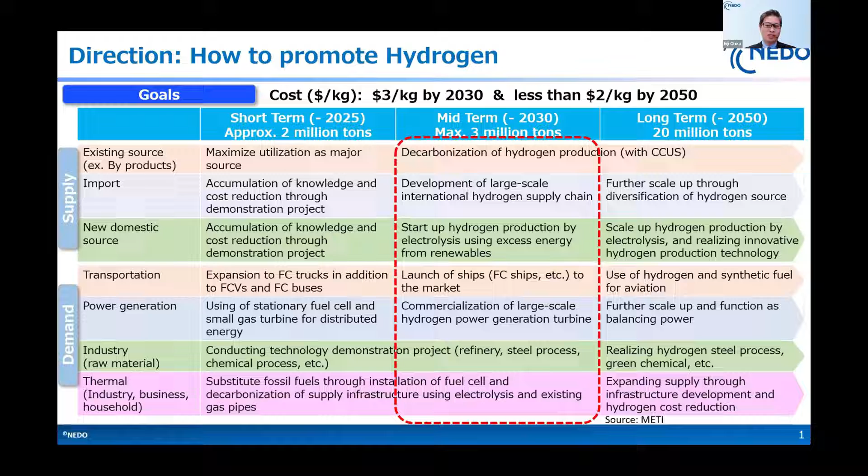But I would like to stress the mid-term, 2030. It's a very important year for us because then we may start hydrogen power generation. And to meet a huge amount of hydrogen demand, we may start to import hydrogen by 2030. And also, to expand Japan's domestic hydrogen resources, we have to actually commercialize domestic renewable hydrogen also by 2030. We just have 6 years until this very important year, 2030. We need to accelerate all of the activities.

We have set a new target for 2040 in the hydrogen target, an electrolysis installation target, which is 15 gigawatts, and globally we may set a carbon intensity based criteria. But most of all, I would like to say that the main point of the new strategy is that it's not only an energy and environment policy, but also an economic policy.

Under the new strategy, Japan's government is pushing to accelerate industry activity globally, where the new strategy sets several priority areas, which are power generation and fuel cells, electrolysis, hydrogen supply, hydrogen carriers, and hydrogen storage technology. In any of these priority areas, we are pushing to develop new markets globally.

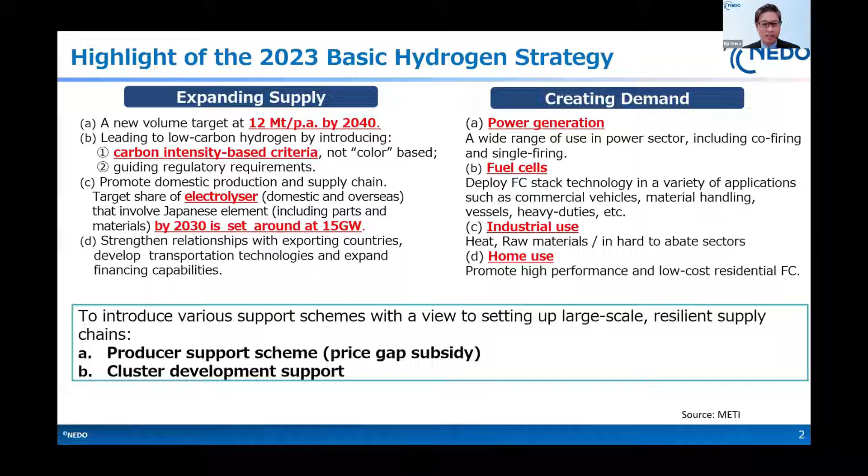This slide shows the current status of hydrogen application in Japan. We have stationary fuel cells, residential fuel cells, which indirectly use hydrogen on a city gas basis, but in a huge number already installed—500,000 residential fuel cells in Japan. In the mobility sector, we have 8,000 passenger vehicles, 150 fuel cell buses mainly running in the Tokyo area, where you may see them frequently, and we have 170 public stations.

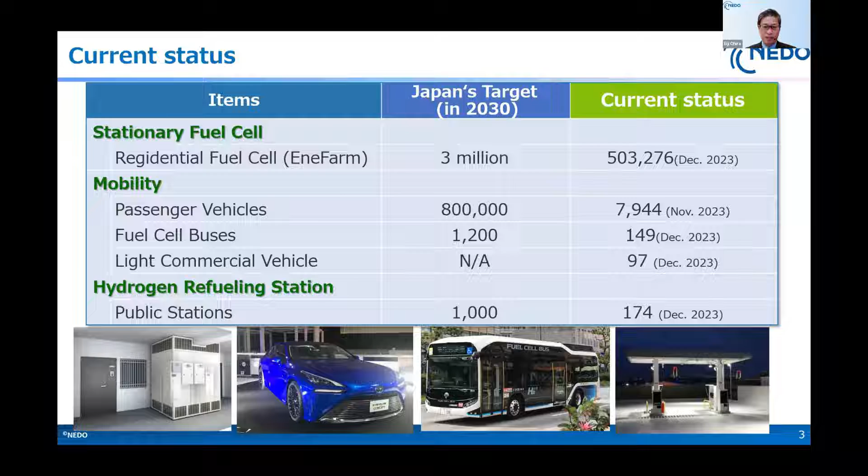Under private sector efforts, we may develop several new fuel cell applications. Honda and Toyota announced a new fuel cell vehicle, the Honda CR-V, and are collaborating with truck companies—we may have heavy duty trucks with Hino or Isuzu. Also, Japan Railway Company JR East has joined in hydrogen; they started demonstration of a fuel cell train.

Recently, motorcycle companies Kawasaki and Suzuki, etc., developed hydrogen engine vehicles and hydrogen motorcycles. For example, the Research Association of Hydrogen Engines developed a hydrogen buggy which participated in the last Dakar Rally.

So from this slide, I will talk about NEDO's activities. We are working on hydrogen production, storage, transport, and utilization, and we support fundamental research, applied research, and demonstration, along with regulation, codes and standards.

Today I'd like to pick up our activity about hydrogen scaling up. The first slide will show our recent work on demonstration of commercial vehicles. We believe commercial vehicles are a key device to develop enhanced hydrogen demand or improve the capacity factor of hydrogen filling stations.

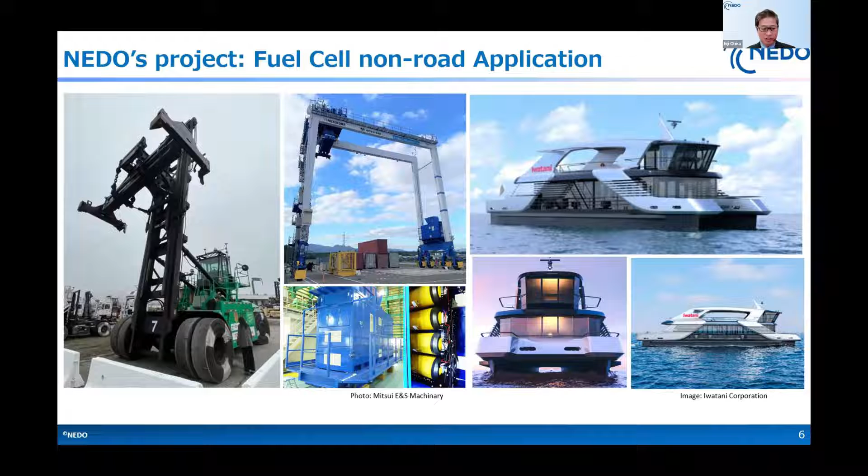In terms of application as a transition, we believe the hydrogen gas turbine is a key device to develop and enhance hydrogen demand. We are working on a small size hydrogen gas turbine developed by Kawasaki Heavy Industry, which we've demonstrated over 5-6 years. They're also working on a large scale 100 megawatt class hydrogen gas turbine power generation.

And Mitsubishi Heavy Industry is working on developing a hydrogen combustor. Our next step, we may install a hydrogen combustor at an existing power station. This demonstration may start next year.

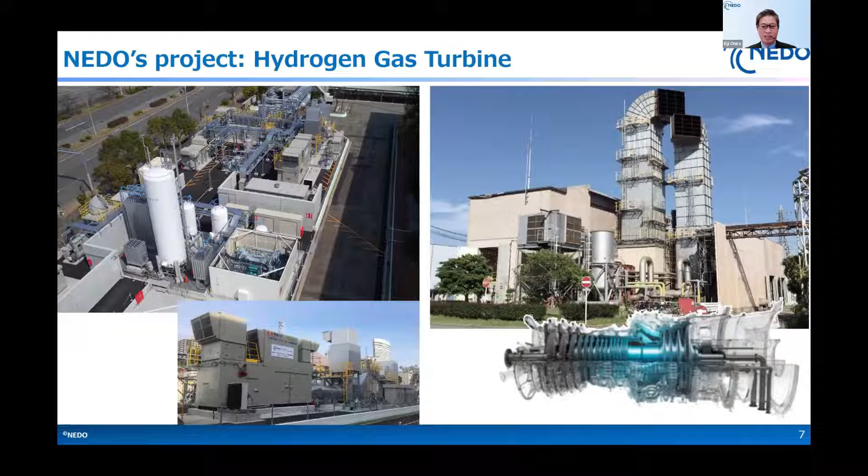To meet the future large hydrogen demand, it's very tough to cover with domestic hydrogen in Japan, so Japan plans to import hydrogen. The challenge is how to concentrate hydrogen for long distance transportation.

There are several types of hydrogen carriers we're working on, but this slide shows our liquefied hydrogen activities. Thanks to Kawasaki Heavy Industry technologies, we've already developed a small but very first liquefied hydrogen tanker, and our test journey between Japan and Australia has concluded successfully.

We continue this kind of work, and our next step is to develop commercial scale liquid hydrogen transportation technology. This is the image for the liquid hydrogen commercial tanker, and the big point is the scale—the capacity of hydrogen is going to be over 100 times bigger compared to the current demonstration level.

We may start the construction from this year, and construction may complete in 2027 or 2028. You may see the commercial hydrogen tanker in 5 years.

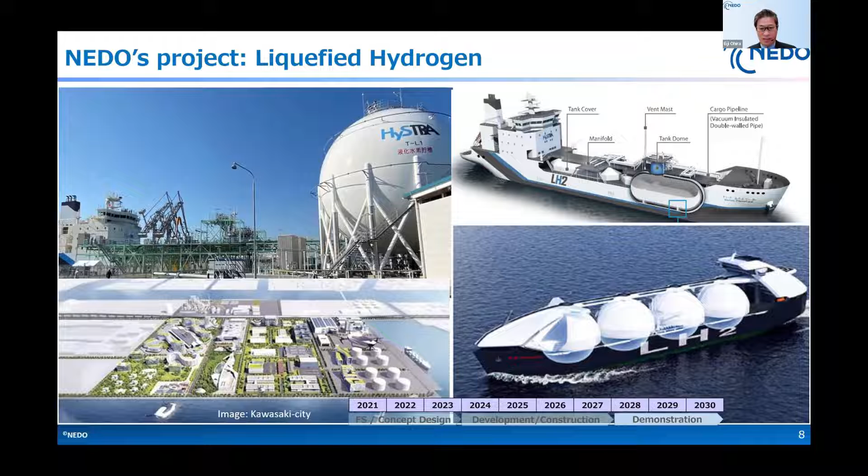Lastly, I will just show the scaling up in electrolysis, which is a key device for power-to-gas technologies. In the short term, we expect PEM and alkaline electrolysis to meet the megawatt scale.

The left side shows our 10 megawatt single stack alkaline electrolysis, and the photo shows our 1.5 megawatt PEM electrolysis. But this is not enough for the commercial side, so we're now working on scaling up both types of electrolysis.

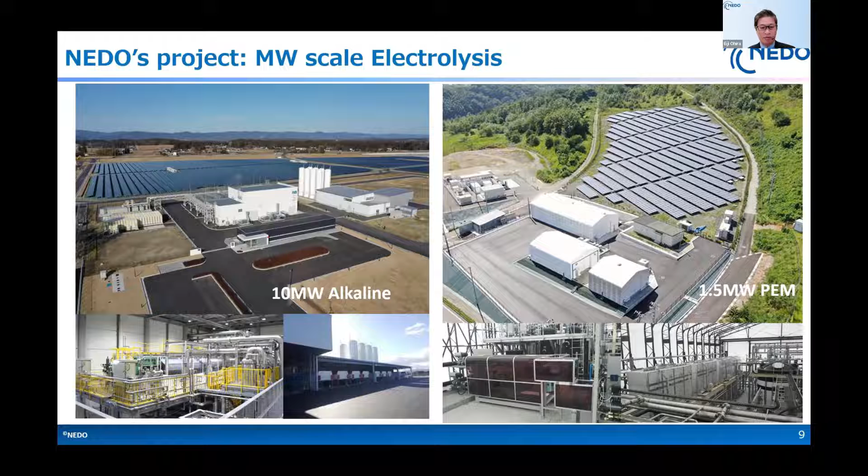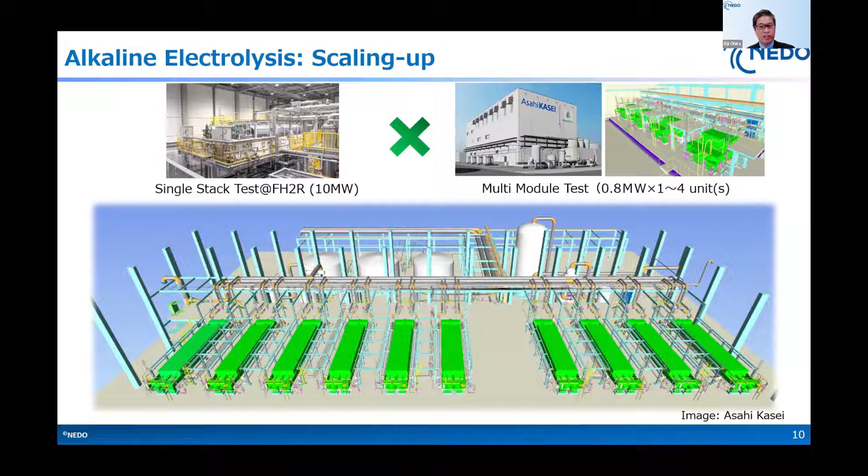This is our image for the scaling up, combining the 10 megawatt electrolysis stack. We make it kind of a multi-module system in the future. This is the image for 100 megawatt, but we may start with 50 or 60 megawatt systems, and we may use it for green hydrogen for chemical production, such as ammonia.

All right, and that's all for our presentation—our activity and policy, and our R&D activities. Thank you very much for your attention.

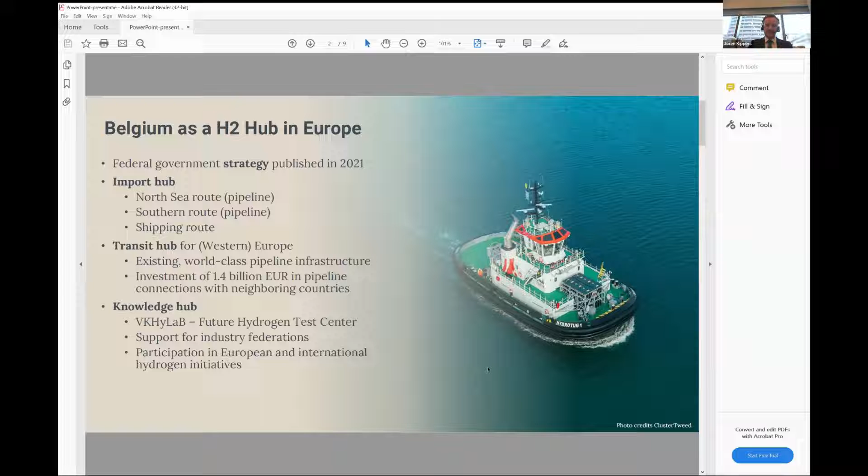Where do we see potential for hydrogen in industry or in the economy in general? Our strategy identifies four key sectors: industry, transport, power, and buildings.

Especially industry and transport are two sectors where we see a lot of potential for hydrogen. We already have a large chemical industry in Belgium that is using hydrogen, and we think it could be an interesting fuel to decarbonize industrial heating processes. We also see hydrogen play a role in heavy-duty transport and as a fuel in shipping. There could potentially also be a use for hydrogen in the power sector and in the building sector, but for the moment, Belgium is very much focused on industry and transport.

Now, how could we work together with Japan? I think Belgium and Japan are in somewhat of a similar position in the sense that we will probably be more importers of hydrogen than exporters. So I think cooperation could focus on three areas: industrial partnerships to further develop hydrogen technology, R&D collaboration into the potential of hydrogen applications, and lastly regulatory cooperation.

For that last part, I think the EU-Japan MOU on hydrogen, concluded in December 2022, will be very important. It has different goals, including working on common standards and certification, exchanges on best practices and lessons learned, and working together on different projects. If we want hydrogen to become a global commodity, we need to work with partners like Japan and others to develop the necessary standards and certification.

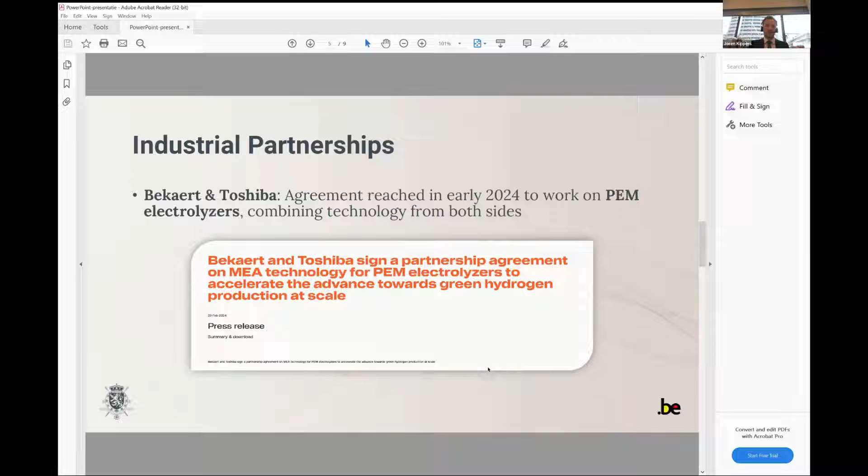Another one, this time in the shipping industry: Compagnie Maritime Belge, CMB, and Tsuneishi, a Japanese shipbuilding company. CMB and Tsuneishi launched a hydrogen-powered ferry in Japan in 2020. This is a small passenger ship that uses hydrogen as a fuel. It's currently active here in Japan, and following the success of this ferry, both companies decided to launch a joint venture in 2021 to further develop hydrogen applications and hydrogen engines for the shipping industry.

One of the projects they would like to do is build a hydrogen-powered tugboat, the HydroPhoenix, which would be a first for the Asian market. There was already a similar hydrogen-powered tugboat active in Belgium, but this would be the first one for the Japanese and for the Asian market.

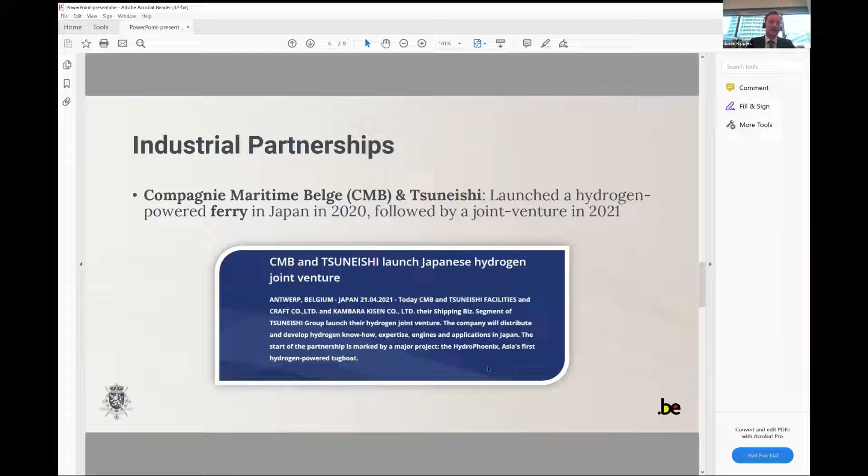Another example from Belgium itself this time is H2PY Serein. This is a pilot project financed by the Belgian government, looking into the use of plasmalysis technology for hydrogen production. The winning consortium consists of a number of different companies from Belgium and Europe, but it also has the involvement of AGC Glass Europe. AGC is a major Japanese industrial company as well, which has its European base in Belgium, and they joined this consortium to work on exploring plasmalysis technology.

A final example of the kind of cooperation we could see in the future: on R&D, the High and Heat project is an EU-funded project which looks into the use of hydrogen as a fuel for high-temperature industrial heating processes, specifically in the aluminum and steel industry. It's a consortium of different European companies - some Belgian, some German, others from Spain. The consortium also includes Toyota Motors, which has its European headquarters in Belgium, so Toyota Belgium will participate in this project as well.

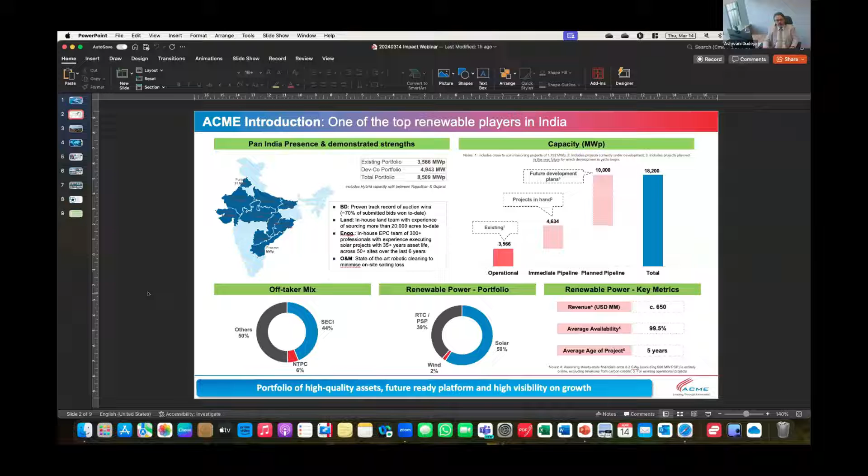Back in 2020, we started venturing into the green ammonia space and developed what was perhaps the world's first fully integrated green ammonia project. It's a small pilot, 5 tons per day facility west of Delhi, about 400 kilometers away, in a place called Bikaner. I'm going to show you a short video of this facility as an introduction to what we are doing.

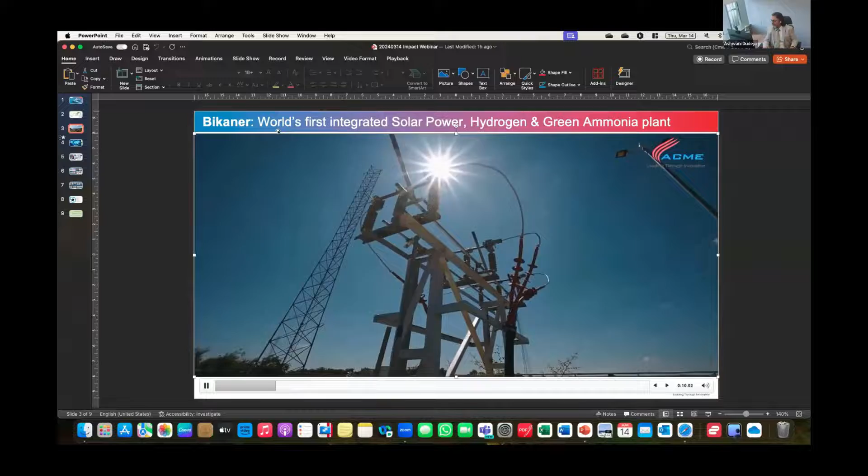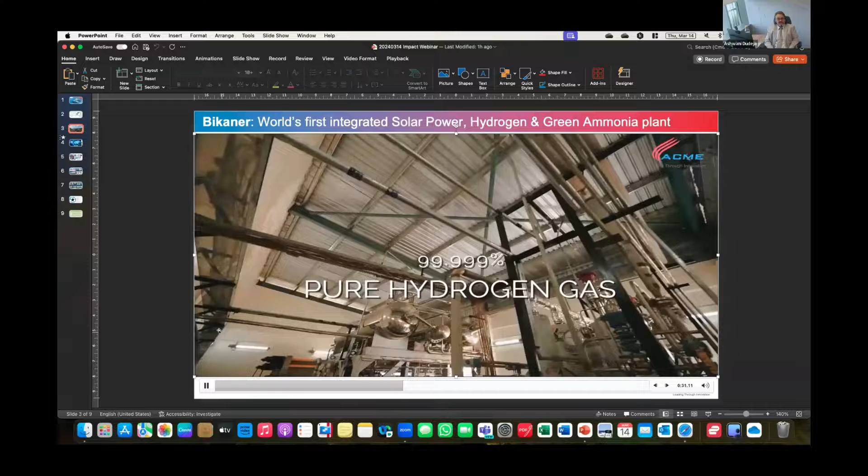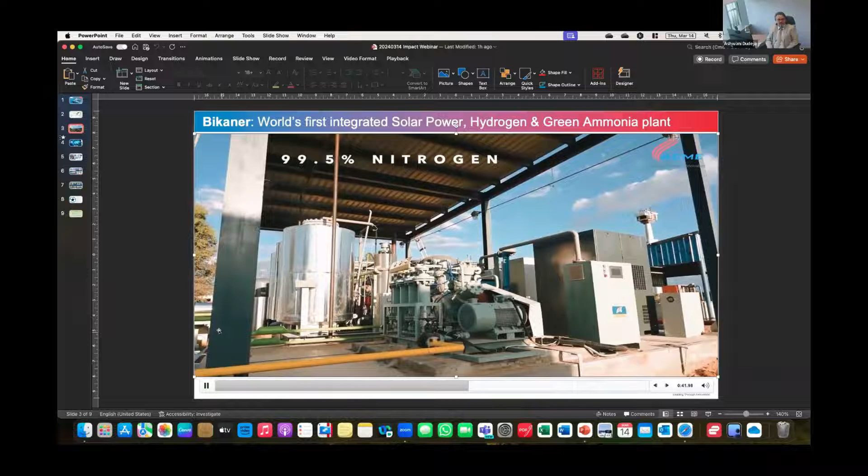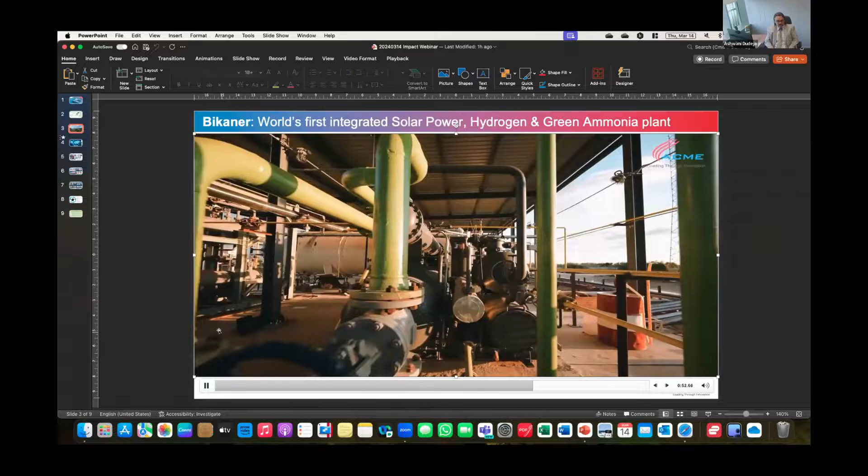This is the plant we built in 2020, a 5 tons per day facility, and everything that could have failed in this plant has already failed. Some equipment failed more than once, but we are very proud to say this facility has now been working for more than 24 months in continuous operation without any breakdown.

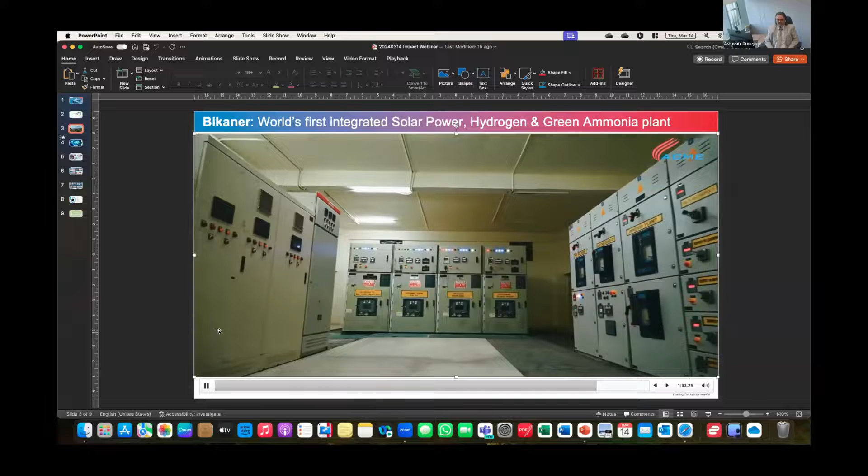We are loading one truck of green ammonia from this facility every 12 to 15 days. This has given us a lot of confidence and experience operating the alkaline electrolyzers installed here. More than 60 operators have been trained, and more than 50 delegations, of which over 30 were international, have visited this facility. This was our starting point back in 2020, when not many people were talking about ammonia. There were only discussions on hydrogen as one of the possible green fuels helping in the energy transition, but not so much attention was being paid to ammonia.

Because we ventured into this quite early, we were also looking at the various places globally where we could develop plants to produce the cheapest molecules. Oman turned out to be one of the favorite destinations in terms of solar intensity, wind potential, locational aspects, political stability, and various other factors we were evaluating.

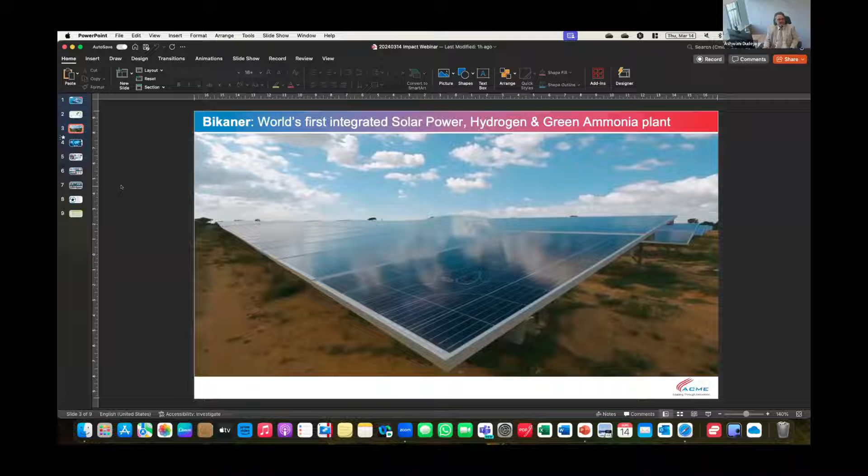We are very happy to share that we are now developing our first large-scale facility of 100,000 tons in Oman. But that's not the only project. Over the last several years, we have developed a pipeline of supply projects in various places. Duqm in Oman will be the first, likely commissioned in the second half of 2026. Following closely will be the East Coast India project in Gopalpur, from where we will produce about 400,000 tons of ammonia in the first phase.

All of this ammonia is targeted towards the Japanese market, and we already have a term sheet signed with IHI Corporation of Japan. Following this would potentially be a project at Port of Victoria, Houston, Texas, and another on the East Coast of India, down south in Tuticorin. Each of these projects is typically going to be about 1.2 million tons, developed in phases as we capture more and more demand.

To capture such demand, we have set up a global presence with offices and representatives. As we speak right now, I have my colleague Kono-san, who is also attending this session. So any of you in Japan, if you need more information, Kono-san would be very happy to talk about it offline.

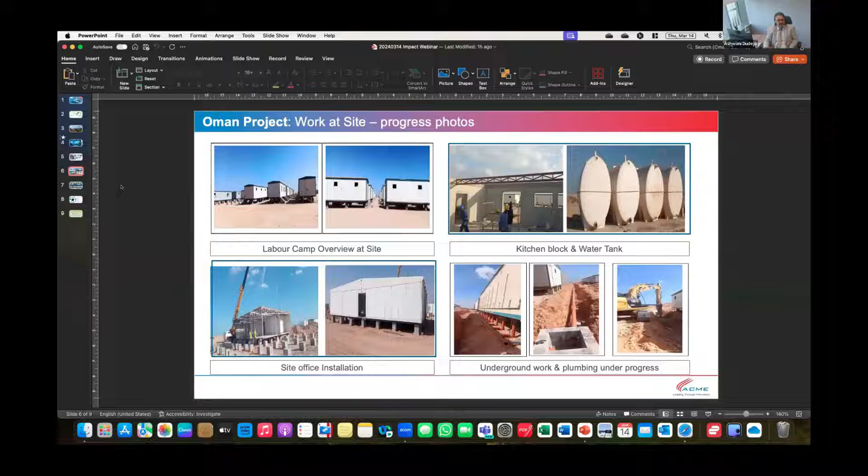We have already done the financial closure for our Oman project, and I will show you quickly a couple of pictures from our site in Oman, where the basic construction activities have already started.

So that's a very short summary about ACME.

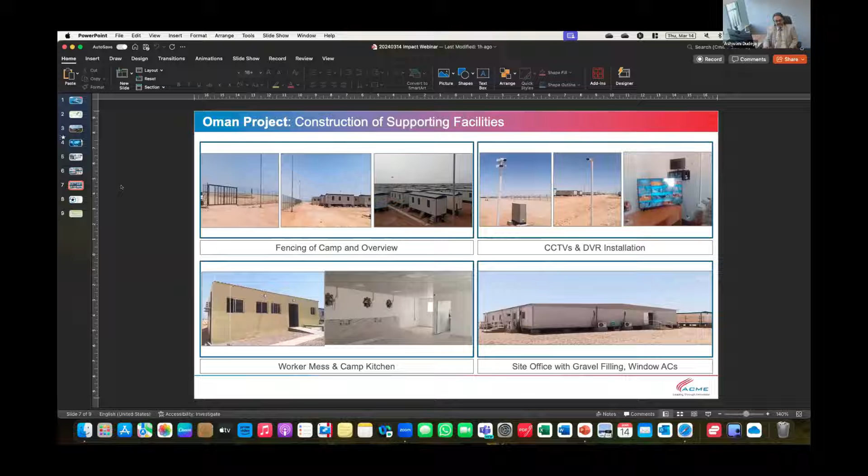I just would very briefly cover some of the challenges which already have been mentioned by some of the speakers previously. I think one of the challenges which everyone talks about is the demand side. But I want to just go beyond demand. Of course, finding demand is the most difficult thing, but once you have found the demand, structuring a commercial contract is even more difficult, I can tell you.

It's not so straightforward. There are no templates available, unlike the LNG industry. There are no standard pricing structures which are available. So you have to do all the discovery between the buyer and seller, and that makes it extremely challenging for both the parties to find common ground.

We also have heard in the previous session about the regulations part, and that to me is a very important aspect. Europe has very clearly taken a stand of going towards renewable fuel of non-biological origin and has established some guidelines and directives under Renewable Energy Directive 2, and 3 is also in the process. But a similar thing has not really been done in Japan or many other parts of the world, which actually creates another very big challenge for a project developer like us.

And the only other one which I would like to talk about in this slide is the end-use applications, which is very important. Most of the project developers at the moment are targeting the low-hanging fruits, which is the existing fertilizer and chemical companies. But there is a case for looking at newer applications, and Japan actually has taken a big lead. We saw how hydrogen running ferries have already been deployed back in 2020 in Japan, but there are direct ammonia firing applications which also have gained a lot of prominence in Japan.

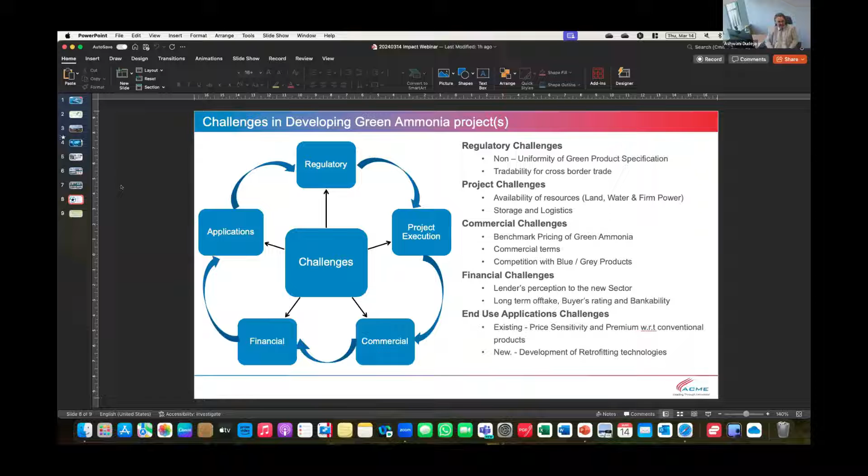25 years ago, 30 years ago, Japan was the only country who were talking about or signing long-term LNG contracts, anchoring a lot of these large-scale projects which came up in the Middle East and various other parts of the world. And something similar should be used for developing the market for ammonia and hydrogen in Japan.

On the regulatory front, as I already said, Europe has taken a very clear path towards electrolysis-based hydrogen and ammonia, but Japan has not done so far, has not announced any kind of regulatory aspects or certification aspects which will clearly distinguish the blue projects or the blue ammonia from the green ammonia.

And our one very strong recommendation, as a company which is focusing only on green rather than blue or gray projects, is to focus on green projects, because we all talk about reducing the cost of green ammonia and hydrogen in the longer run as the economies of scale increase, but the economies of scale is not going to happen until there is demand and the projects are developed for green hydrogen.

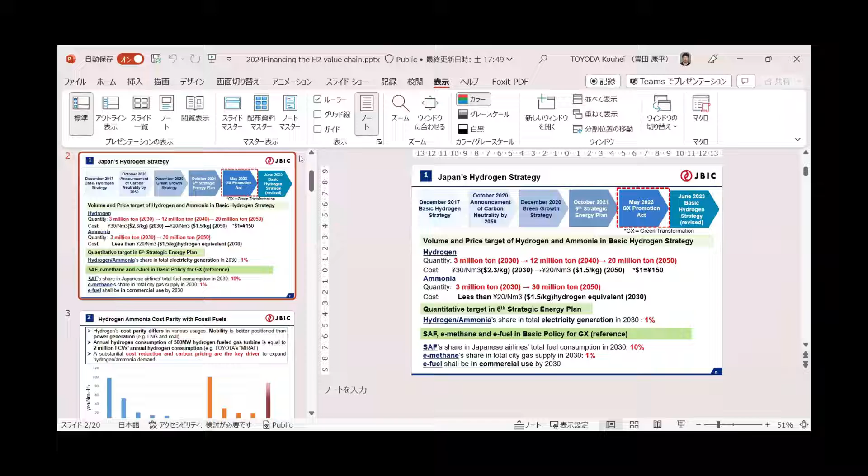Can you see the slide? Yeah, we can see it well, but I think it's in presenter mode. If you can adjust the display mode, that would be better. Working, I think it's still in presenter mode. Can you try to make a full display? How about this? It's better right now, but I think we can just skip this part and you can continue your presentation. No worries, okay.

Hi everyone, I'm Kohei Toyoda, Director General for Energy Transformation Strategy, Japan Bank for International Cooperation, JBIC. First of all, thank you for having me today. I'm going to talk about financing the H2 value chain, Japan's public-private partnership.

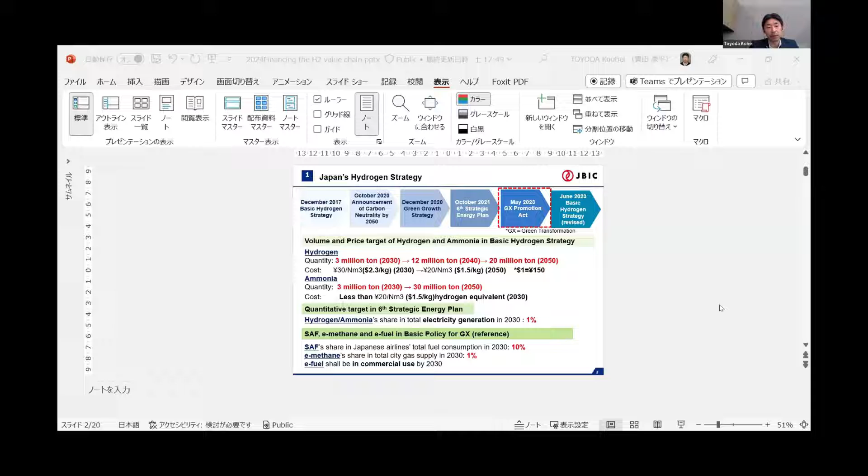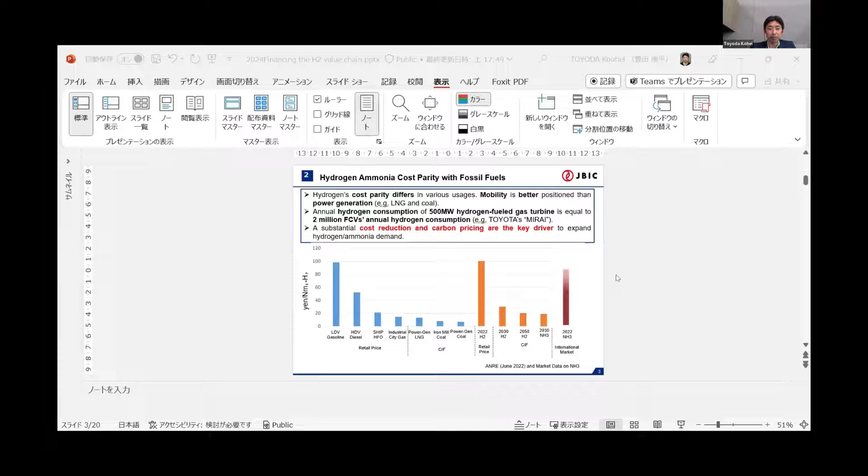And there are 3 ways to reduce the cost of hydrogen: technology innovation, economy of scale, and reducing cost of capital. For technology innovation, Ohira-san already covered the issue. But the government established a 2 trillion yen Green Innovation Fund, which is around 13 billion US dollars, supporting various hydrogen-related technology development.

And in order to induce such a large amount of investment, the government will issue 20 trillion yen GX transformation bonds, which is around 130 billion US dollars, to support early movers. The government also introduced a carbon pricing framework, such as Japan ETS, carbon credit auction, and carbon duties, to redeem the bond, as well as increase the cost of GHG emissions.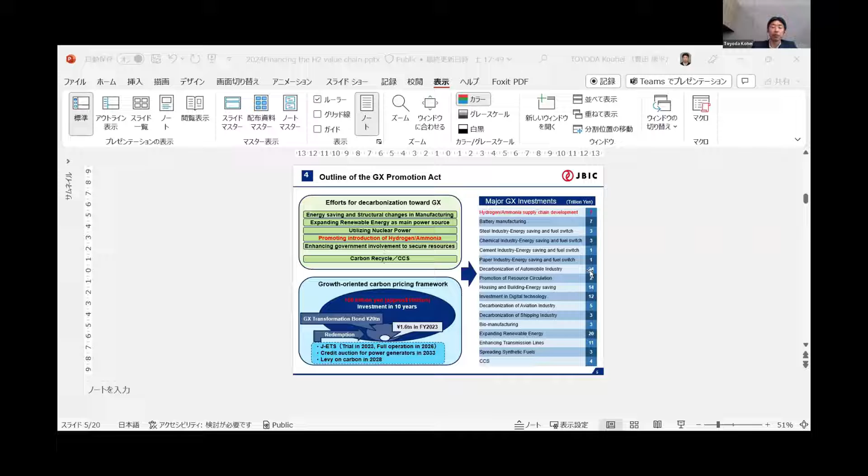The right-hand side is a breakdown of this 150 trillion yen. Japan will invest a minimum of 7 trillion yen for hydrogen ammonia supply chain development, as you can see at the top. And in order to increase the demand for hydrogen, which is quite an expensive energy for many off-takers or end users,

the government of Japan will introduce a large-scale support program, similar to Contract for Difference in the UK. The Japanese government bridges the gap between the strike price, which enables hydrogen suppliers to recover costs and receive a reasonable return on investment, and the reference price, the heat equivalent price of existing fuels such as coal and gas, which enables off-takers or final consumers to utilize clean energy like hydrogen at no or little additional cost for 15 years. The government will spend 20 billion US dollars on this program.

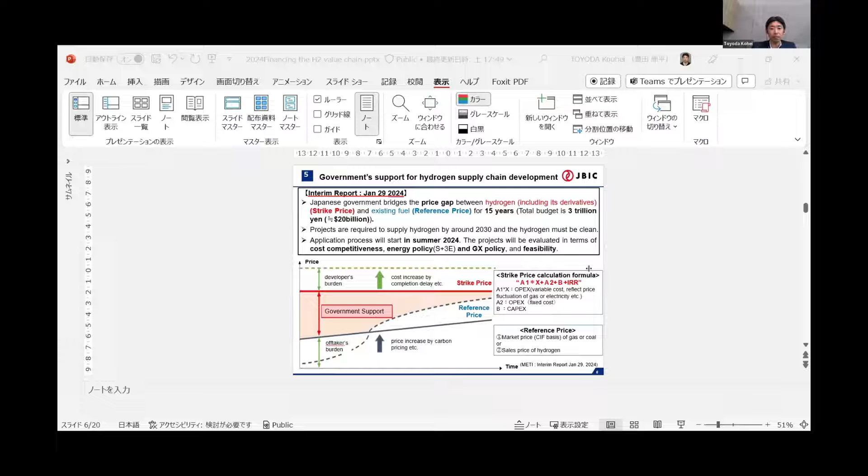On capital cost, I'd like to introduce the World Bank's flagship hydrogen report, which was published 3 weeks ago, and JBIC was part of the working group.

Hydrogen production requires a large amount of investment, especially green hydrogen. This is a ballpark figure, but in order to produce 1 million tons of green hydrogen per year, we need 10 gigawatts of electrolyzer, 20 gigawatts of renewables, and 30 billion in investment.

And cost of capital substantially affects the cost of hydrogen. For example, if you see the graph at the top, if we can reduce capital cost from 15% to 5%, hydrogen price will fall by 45%. In order to reduce the cost of capital, we need to maximize utilization of debt or loan instead of equity, because the cost of debt is much lower than equity, as you can see at the bottom of the slide.

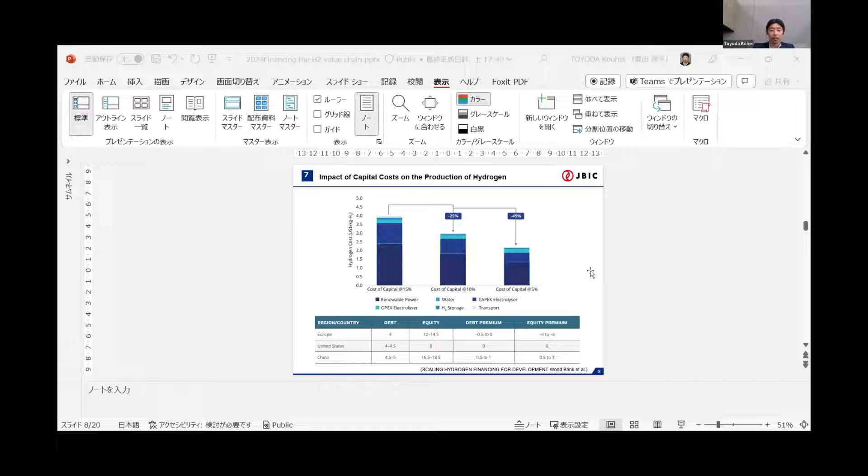On the other hand, debt providers, including banks, are risk averse because their profit margin is slim and there's no upside profit. That's the reason why de-risking, or creating the appropriate risk allocation framework, is very important to reduce the cost of capital and reduce the cost of hydrogen.

This is the image of how we can reduce the cost of capital by de-risking the project. For example, we can reduce volume risk by long-term offtake. We can reduce credit risk by partial loan guarantee. We can reduce price risk through contract for difference support. We can reduce offtake risk by developing a spot market. We can reduce political risk by insurance, or we can reduce infrastructure risk by hydrogen hub development.

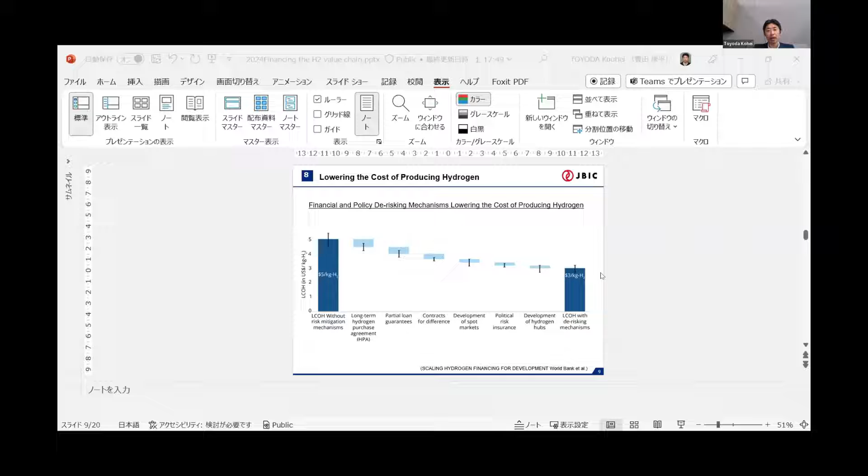As a policy-based financial organization, JBIC contributes not only by providing competitive long-term financing, but also by creating de-risking mechanisms or appropriate risk-sharing mechanisms in collaboration with government, investors, developers, off-takers, technology providers, contractors, and financial institutions.

Next, I'd like to introduce JBIC's organizational capability and our effort to support hydrogen business around the world. JBIC is a government financial organization 100% owned by the government of Japan, and we support Japanese businesses, including Japanese companies' investment, export, as well as import of natural resources, and nowadays including hydrogen.

JBIC has implemented 3 initiatives to accelerate or enhance our effort to support hydrogen projects. In July 2022, we established the Energy Transformation Strategy Office. The office is responsible for all debt-related hydrogen transactions around the world, from upstream to downstream. I'm the head of the office.

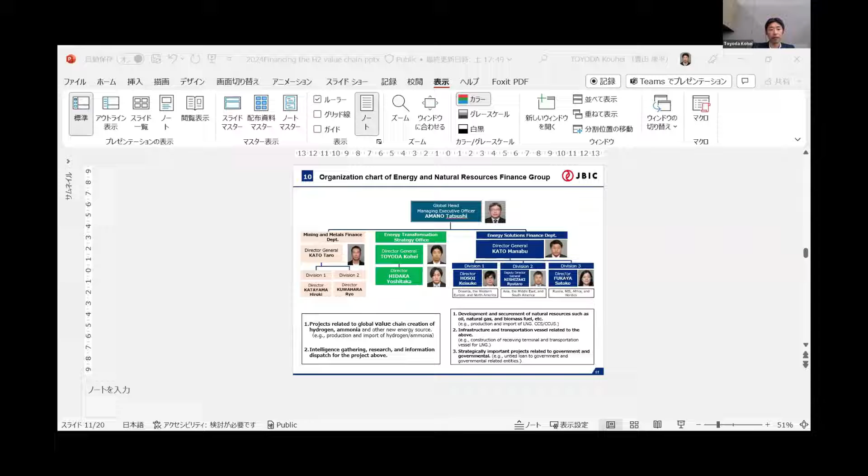In addition to these initiatives, JBIC is expanding our hydrogen network by signing MOUs with major hydrogen players around the world, including private companies, government, or government-related entities.

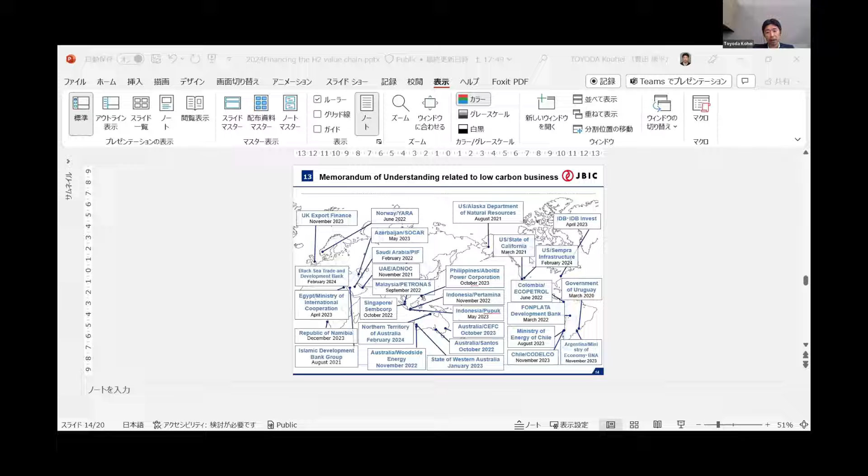So because of time constraint, I'm stopped here. Thank you for listening.

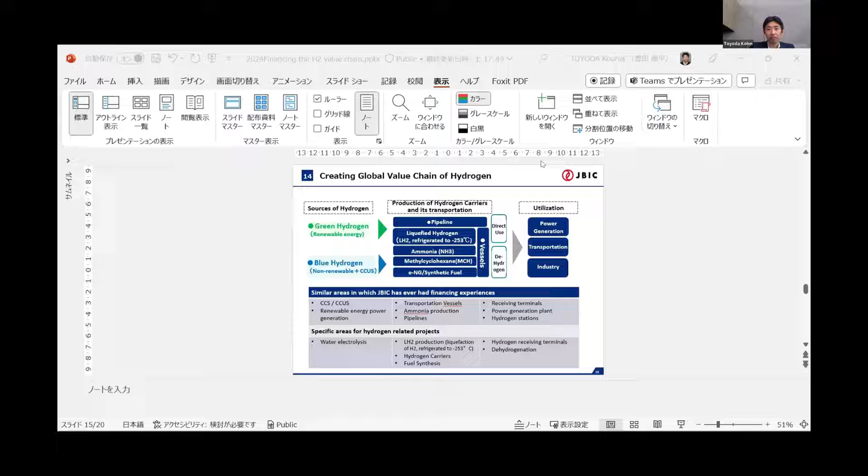Toyoda Kohei-san, many thanks for your kind sharing of Japan's private partnership of Japan's hydrogen value chain. I'm sure this is a very solid presentation for our audience who are eager to explore the hydrogen investment opportunities in Japan. During your presentation, we've already received some questions from our audience. So first of all, could you please help us explain what are Japan's strengths and weaknesses in leading the global hydrogen society in terms of hydrogen investment and technologies?

Thank you. Japan has many advantages, including technology advancement, and also Japan is developing several hydrogen carriers. In some countries, they don't need this kind of hydrogen carrier - it's local production, local consumption. In case of Japan, Japan will import hydrogen, so hydrogen carrier is very important, and Japan is the leading player in developing hydrogen carrier technology.

At the same time, the big disadvantage is the production cost. Our renewable energy is very expensive, and we have no gas or fossil fuels. That's the reason why we need to import hydrogen from supplier countries, maybe like India, Australia, Middle East, US. So the cost is a big disadvantage, but we can cover this disadvantage by our technological advantage, together with government strong support and JBIC support, I believe.

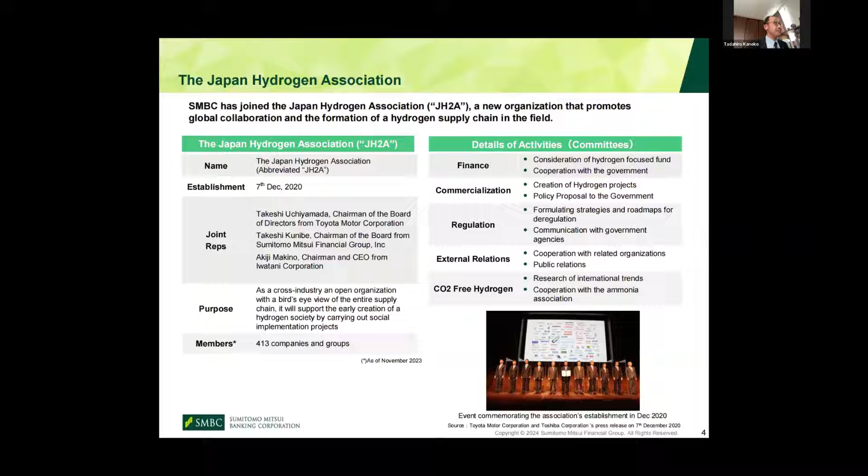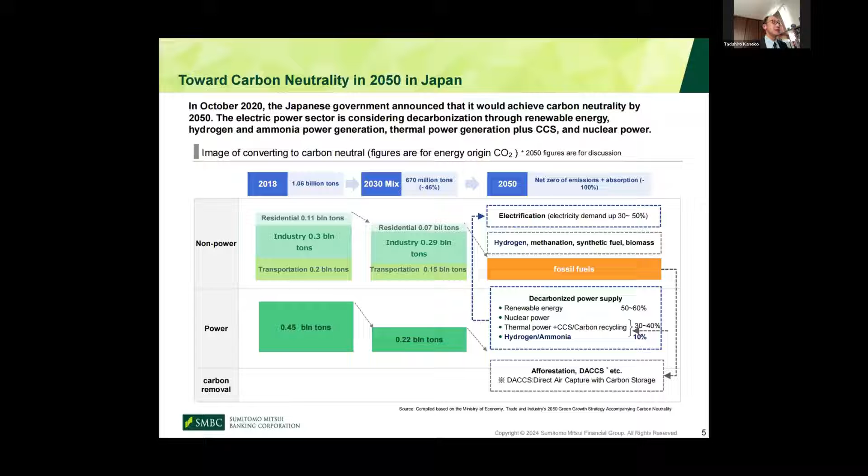Finally, I would like to briefly introduce the actual financing cases we started to experience in the past two years around hydrogen. The first one, from about 2.5 years ago, is a project financing in French Guiana, South America. This country traditionally relied on diesel power generators, which have a heavy environmental burden. This project finances the use of solar power electricity, with hydrogen as energy storage. One big factor in forming this project financing was the off-taker, EDF, the French power company, which enabled the financing to come together nicely, and SMBC was able to participate in this deal.

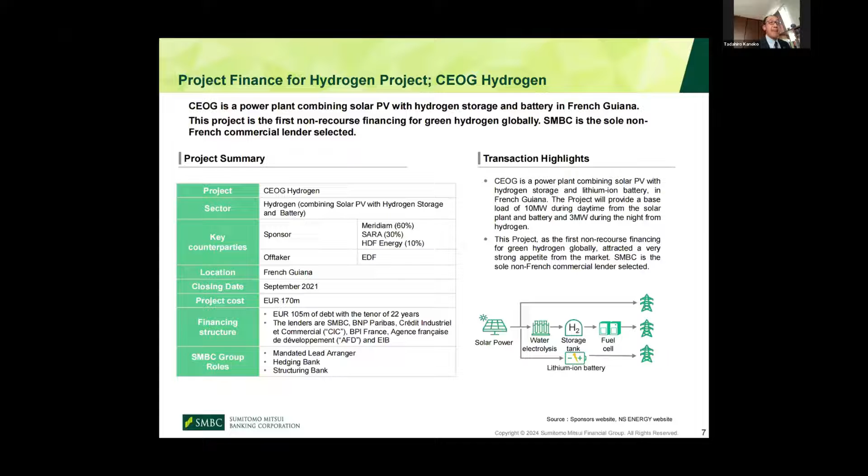Another example is the very famous Project Helios, a big green ammonia project in Saudi Arabia that closed in April last year. This is a very big deal joined by more than 20 global financial institutions, including major Japanese banks. One key enabler for this financing project was the offtake proposed by Air Products, the American energy company with experienced knowledge of handling ammonia globally.

So, as we discussed today, we still have a big challenge finding final off-takers of hydrogen and ammonia. But we are already gradually starting to see financing cases completed, like these examples. I would pause here—thank you very much for your attention.

Thank you, Kaneko-san, for your kind sharing of how SMBC Group has been working towards the social implementation of hydrogen, as well as its transition finance playbook. During your presentation, we received some interesting questions from our audience. First, could you please explain how you see the return on decarbonization investment when combining government support measures with private sector initiatives?

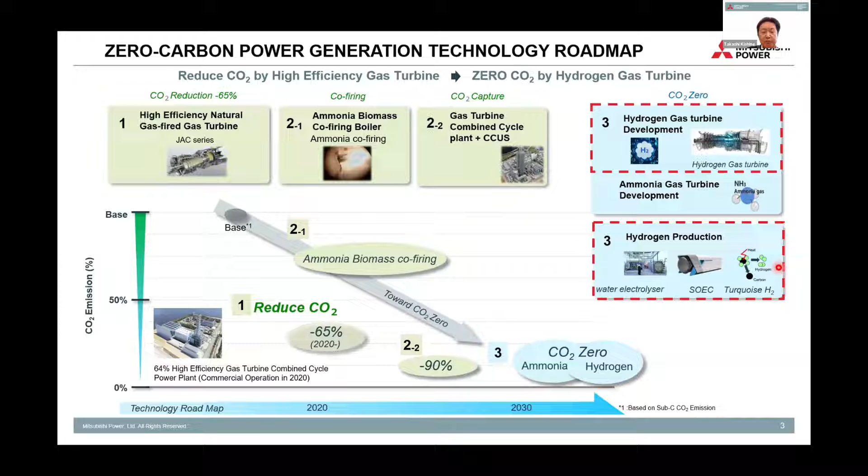One is high efficiency level, achieving over 64% combined cycle efficiency by applying various advanced technologies, such as high pressure compressor and enhanced air-cooled combustor, and also advanced thermal barrier coating for the surface of the cooling blade and burner.

Next is high reliability, achieving beyond 99.6% reliability during over 2 million operation hours in commercial units. Now there are a total of 65 units in commercial operation of JAC gas turbines, and the total orders number is 122 units.

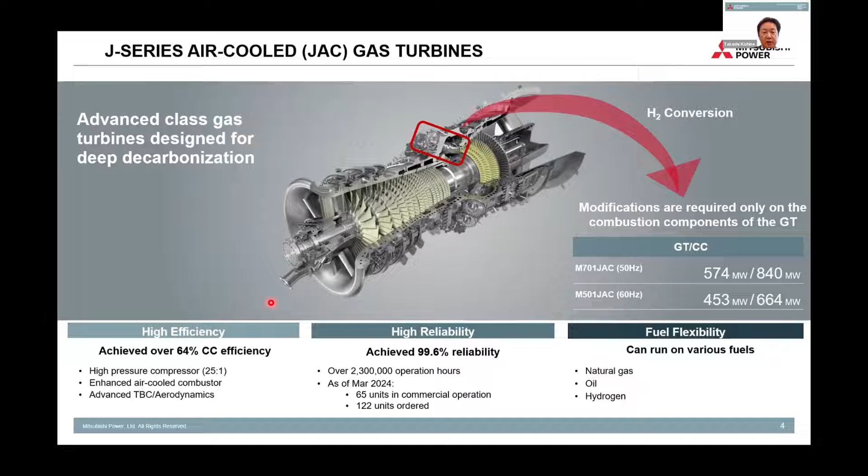The JAC gas turbine also has fuel flexibility technology. Of course, the gas turbine can burn natural gas and distilled oil, and also by changing only the combustor portion, this gas turbine can burn hydrogen and ammonia fuel. That is the JAC gas turbine's three technology features.

This slide shows our combustor technology for hydrogen firing. We have three combustion technologies for hydrogen. The first, type 1, is old conventional technology with diffusion firing with water and steam injection to reduce the NOx level. This technology is already completed to burn 100% pure hydrogen.

The next, type 2, is the current technology for natural gas firing in the gas turbine. We call it the premix type dry NOx combustor nozzle. By applying this technology, we can burn 30% co-firing of hydrogen without modification. This technology has been completed, and the next target is 50% hydrogen co-firing by applying this same type of nozzle.

Now we are going to carry out an actual machine test in autumn of this year.

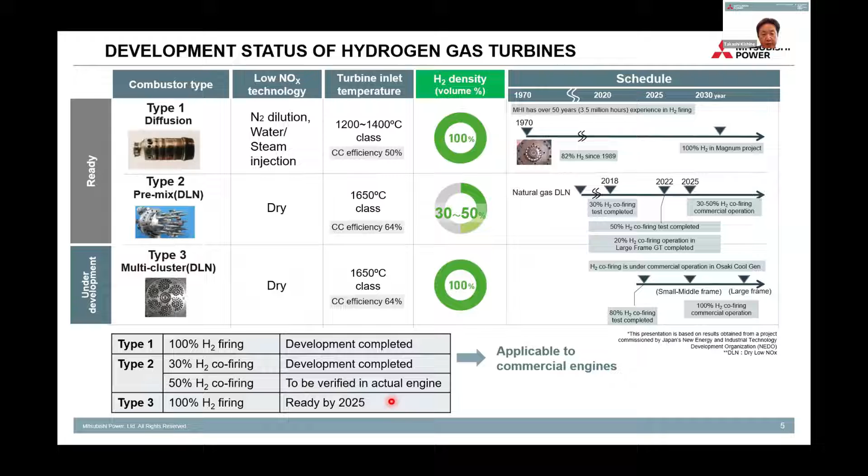Finally, type 3, we call the multi-cluster type combustor. This combustor can burn 100% pure hydrogen in dry condition. This technology is now under development. Our target is to complete this technology by 2025, next year.

These combustor technologies we can verify and validate by using the Takasago Hydrogen Park, as you can see. This hydrogen park is located at our mother factory in Takasago, on the western side of Japan, close to the Osaka-Kobe area. This facility has three types of facilities.

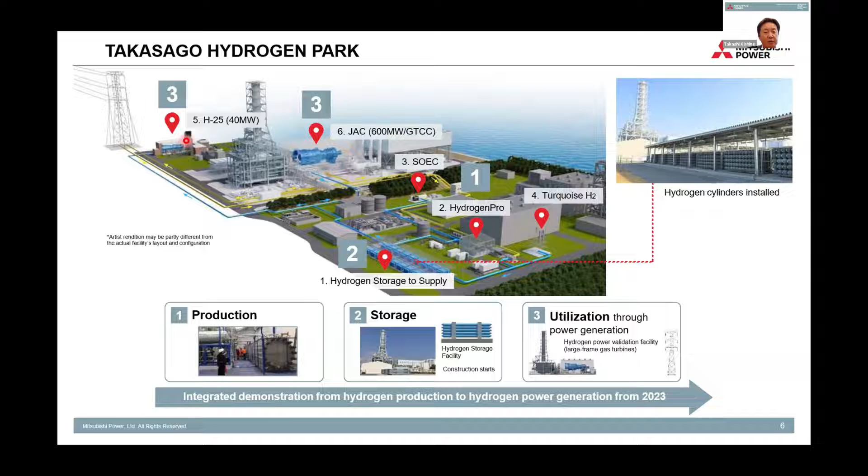First is a hydrogen production facility, and next is a hydrogen storage facility. And also for utilization through power generation, we have two gas turbines in this Takasago Hydrogen Park. One is a large size gas turbine, the JAC gas turbine. The other is a small type gas turbine, the H25, 40 megawatt plus gas turbine.

This slide shows the detail of the hydrogen park. This shows hydrogen production. We already installed the alkaline electrolyzer inside this building. This hydrogen electrolyzer started commercial operation last year.

We are also planning to install another type of hydrogen production, for example solid oxide electrolysis cells, SOEC. This type of hydrogen production will be installed this year. Also another type, methane pyrolysis for turquoise hydrogen, this facility will be installed in 2026 as expected. We will also install the anion exchange membrane type, AEM water electrolyzer.

That is hydrogen production. The next facility is hydrogen storage. We installed a total of 350 cylinders to store the hydrogen.

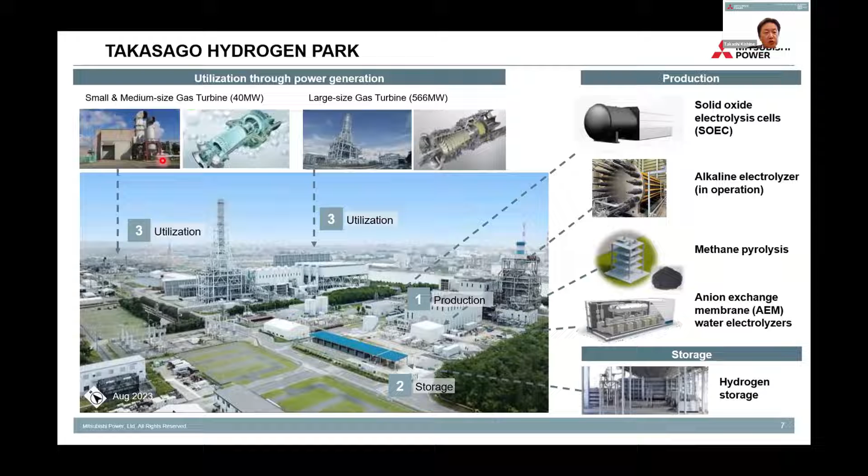This slide shows our first 30% hydrogen co-firing test last November. That is the world's first actual machine test using a large size gas turbine. We successfully completed the 30% hydrogen co-firing test in the 501 JAC machine for 60 Hz application. Through this actual machine test, we could confirm not only the gas turbine performance, but also the emission, reliability and so on as expected.

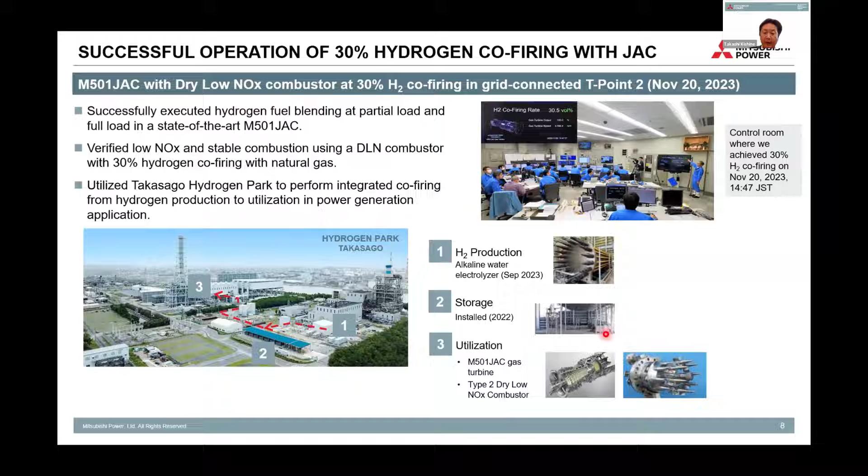From now, we are planning two types of tests this year at the Takasago Hydrogen Park. One is utilizing the JAC large frame gas turbine, where we will conduct the 50% hydrogen co-firing test this autumn. The other test is for the middle size, small size H25 gas turbine, where we will try pure hydrogen firing by applying the type 3 multi-cluster type combustor this springtime.

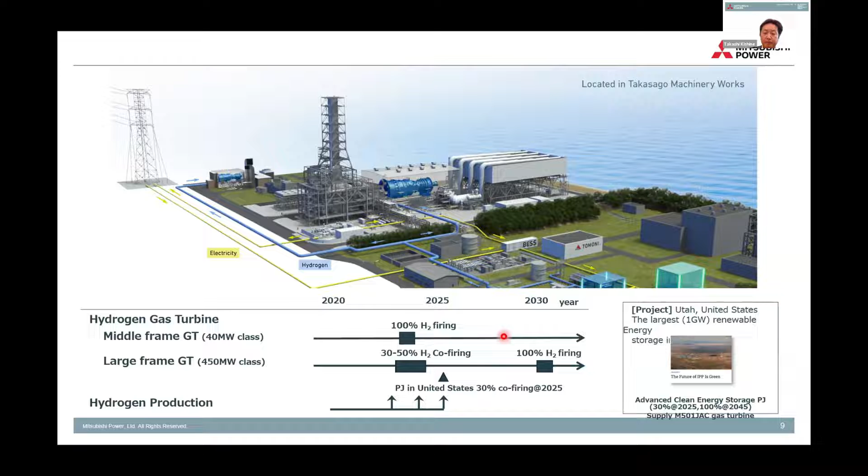Other than the Takasago Hydrogen Park, we have many hydrogen projects utilizing our gas turbine all over the world, in Singapore, Australia, Europe, and the US.

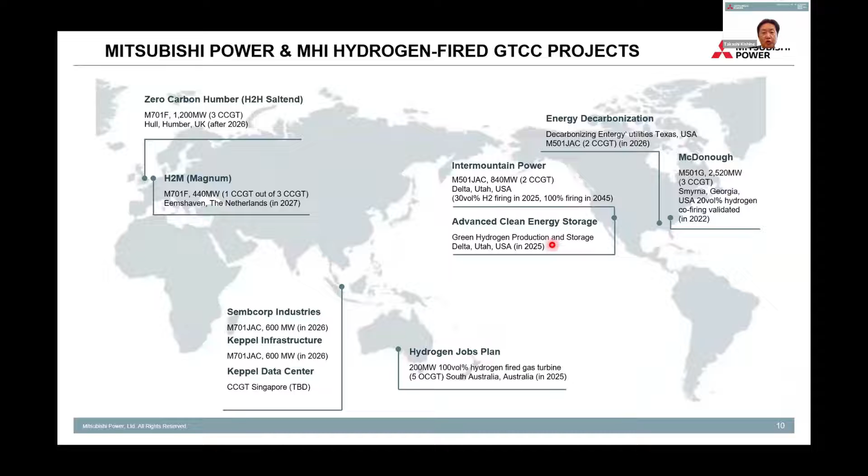We would like to introduce the Advanced Clean Energy Storage Project, called the ACES project, in Utah, USA. This is a very unique project. By applying excess renewable energy from solar panels and wind power, we generate hydrogen using a water electrolyzer. A total of 15 units of electrolyzer have been installed at the site.

This electrolyzer is the same type as installed in the Takasago Hydrogen Park. The generated hydrogen is stored using a salt cavern underground. Then this stored hydrogen can be utilized in power generation with a JAC gas turbine. Now this project is ongoing.

30% co-firing of hydrogen will start commercial operation next year, and further, no later than 2045, pure hydrogen firing will be conducted. That is the ACES project in the USA.

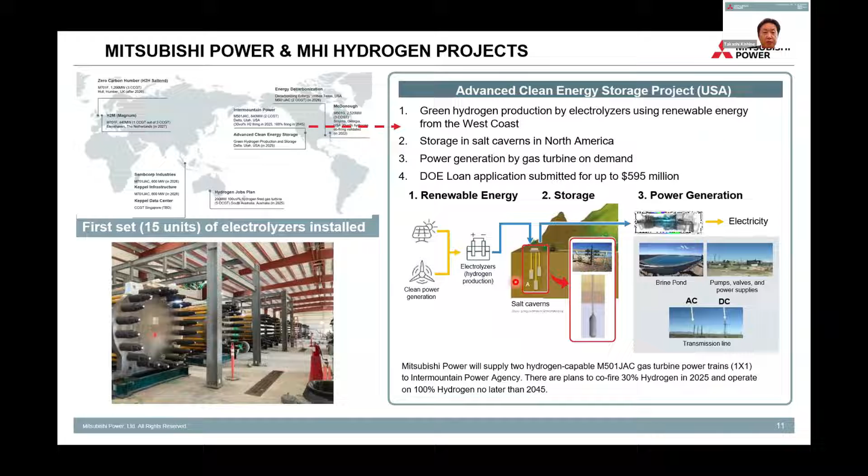Finally, this is a summary of our Mitsubishi gas turbine hydrogen roadmap. For large size gas turbines, in order to achieve the EU taxonomy's CO2 emission target of 270 grams per kilowatt hour, we will try to increase to 50% hydrogen co-firing this autumn.

For the small size gas turbine, we will try pure hydrogen testing using an actual machine located at Takasago Machinery Works this spring. We are also developing ammonia firing gas turbine technology as another zero CO2 emission technology. This ammonia firing development will be completed by 2025. That is our roadmap to zero CO2 emission by applying hydrogen and ammonia firing gas turbines.

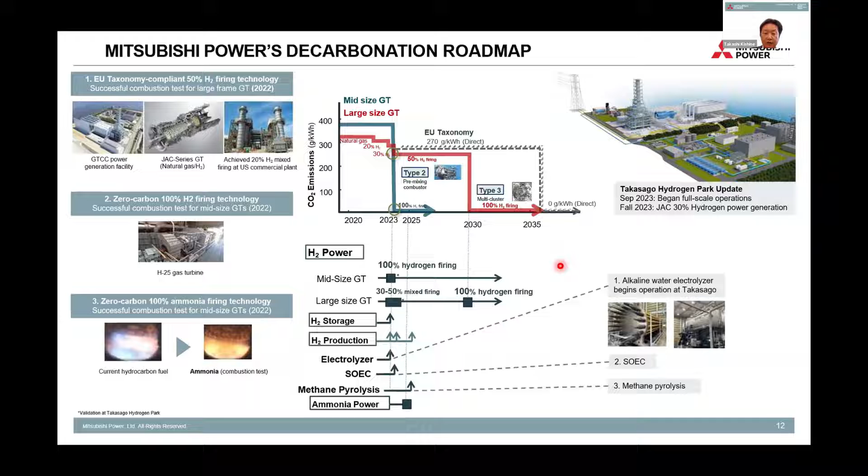Our message is that hydrogen is not the future, it is real today. That is my presentation. Thank you for your kind attention.

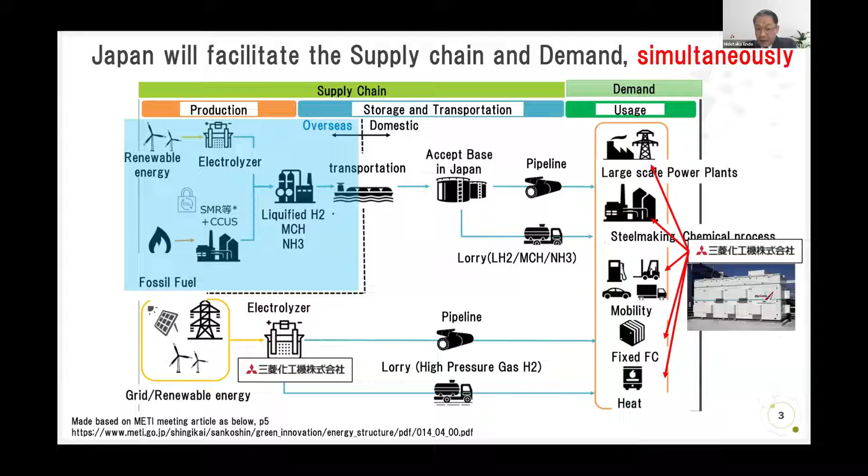But these days, this supply chain and demand process, to my regret, produces GHG at the same time. So we need to solve these problems. For example, our chemical plant and engineering players may collaborate with emission trading companies. Such a combination will be an effective solution in Japanese society.

For example, mobility players, if they introduce FC vehicles, FC trucks, or FC buses, they can get emission trading rights. A fixed fuel cell, heat, hydrogen boiler and so on are the same. For example, Bywell is the biggest company to reach the J-credit. Such a company converts their emission rights to money - the emission rights change to J-credit, which is a kind of compliance emission credit. So those players get such an offset solution.

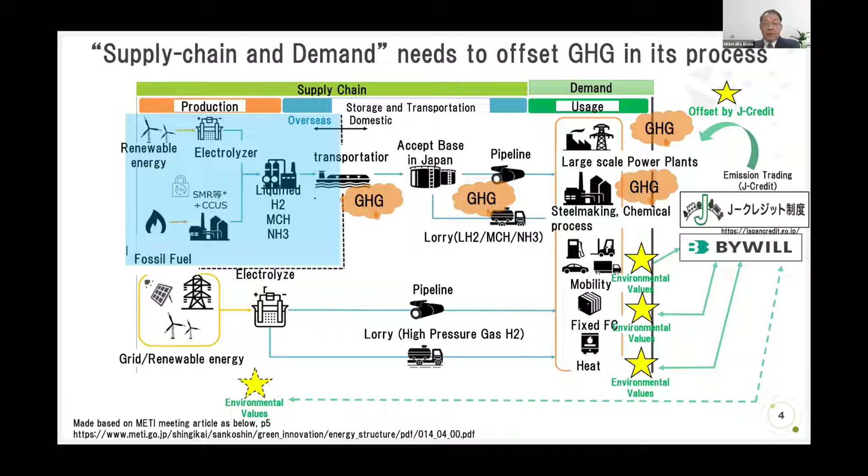So in total, Japan realizes carbon neutrality 2050. Now let's return to the hydrogen business.

As you know, in October 2020 Japan declared carbon neutrality 2050, and the next year revised the green growth strategy. Last year, 2023, the hydrogen basic strategy was revised. This year, the Japanese Diet is discussing the Hydrogen Society Promotion Bill, and this bill will become law by June. So the Japanese market will have good support from the public sector, for example subsidies or CFD - a compensation for the price difference in green hydrogen and ammonia compared to fossil fuel. Such a CFD will start within fiscal year 2024.

This circumstance is a very good tailwind for Japanese hydrogen businesses. And how about the industry players? Since 2014, Toyota and Honda started the FCV business - mobility has been leading Japanese hydrogen businesses. And since 2015, the green hydrogen energy system was released by Toshiba. I was a member who helped establish this business.

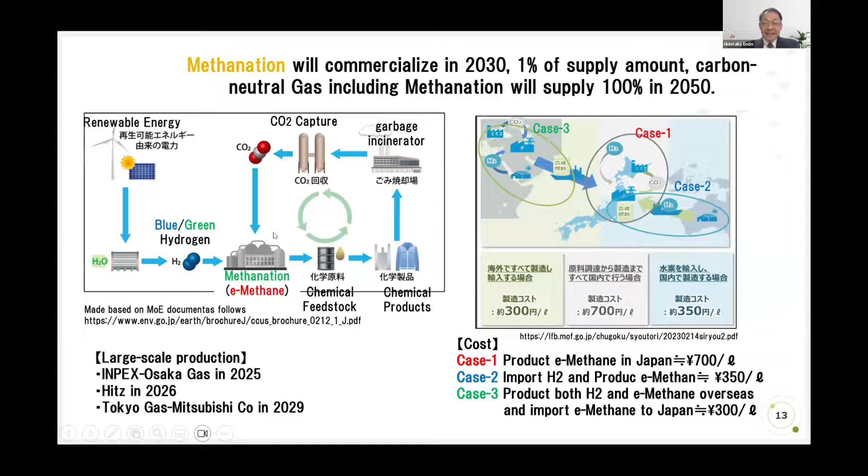So Mitsubishi Kakoki may get a business chance in this good market. And not only methanation, but also e-fuel for mobility and SAF will be realized in the near future. JFE and Itochu, major companies, are struggling to realize this, conducting practical tests and feasibility studies, not only in Japan but also in international supply chains. So I expect e-fuel will be commercialized in the near future in the Japanese market.

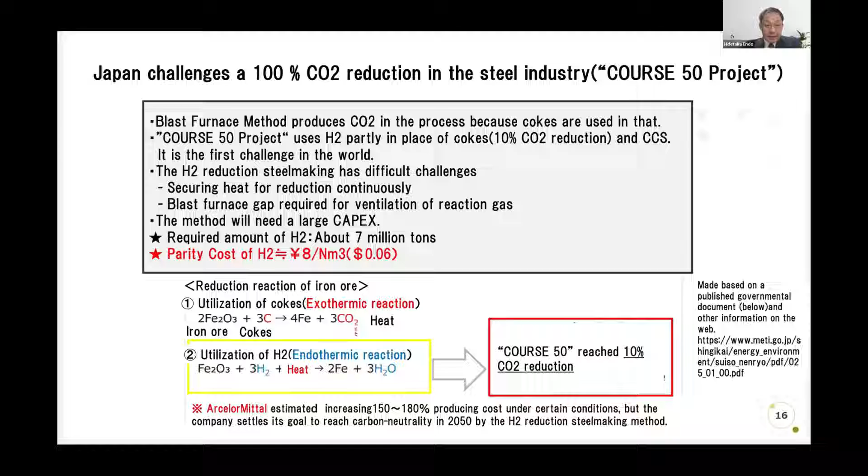And the last one is steel. The steel maker is a good client for Mitsubishi Kakoki, and their plant needs carbon reduction. So governmental agencies released a hydrogen reduction steelmaking technology project named COURSE 50. Nippon Steel or JFE joins the project and leads the carbon neutral steelmaking process. For example, Nippon Steel will challenge a 50% decrease in CO2 emissions in the steelmaking process. It's very ambitious, but I believe they can realize it.

To support this, METI decided financial support will increase from the original plan. The original plan was 1.3 billion US dollars, but it increased to about 3 billion dollars. The basic plan was to complete by 2045, but ahead of schedule, METI declared that the plan will be completed in 2040. That declaration was made in September 2023.

So the Japanese market needs more hydrogen supply chain and demand side. Mitsubishi Kakoki wants to contribute to those needs as a chemical engineering multiplayer. That's all, thank you very much.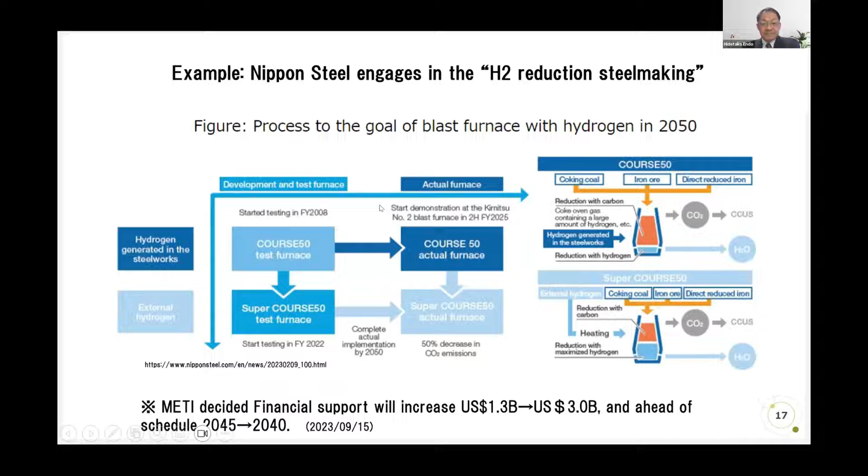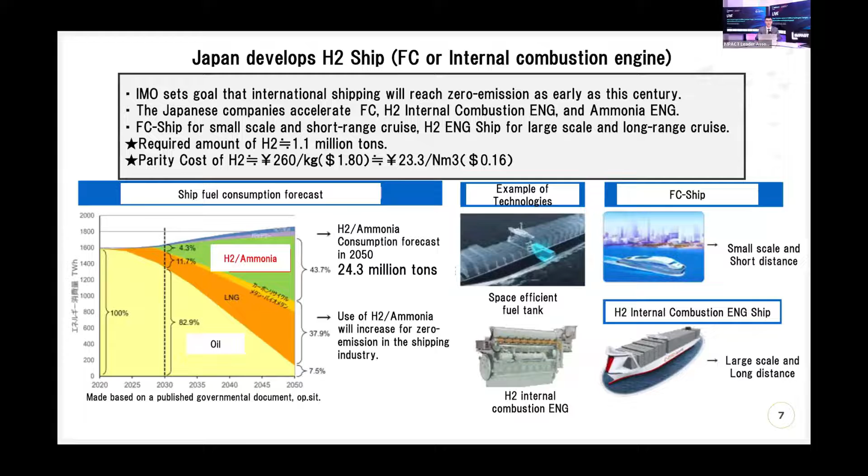Endo-san, I very much appreciate your impressive and comprehensive presentation on the key considerations for sharing Japan's industrial competitiveness in global hydrogen, and consideration for the commercialization of Japan-developed hydrogen technology in different scenarios. During your presentation we received many questions from our online audience, and due to time restriction I'd like to select one. Regarding hydrogen application in the mobility sector, could you explain what makes Mitsubishi confident that the Japanese market will be more viable in the short to medium term for refilling stations, given that many companies are closing down their hydrogen refilling stations across the world?

It's a good question. About FCVs, like the Toyota Mirai or Honda Clarity, such small size FCVs don't consume too much hydrogen, so many hydrogen station players suffer from the small demand and find it difficult to commercialize. Yes, exactly, that is a problem.

But as I mentioned, FC trucks and FC ships will consume more hydrogen, so hydrogen supply station business players will have increased business opportunities. I suppose the governmental plan to increase hydrogen stations to 1,000 by 2030 will be realized. So not only normal FCVs but also FC trucks, FC buses, and Japan will start hydrogen supply stations for ships in 2024.